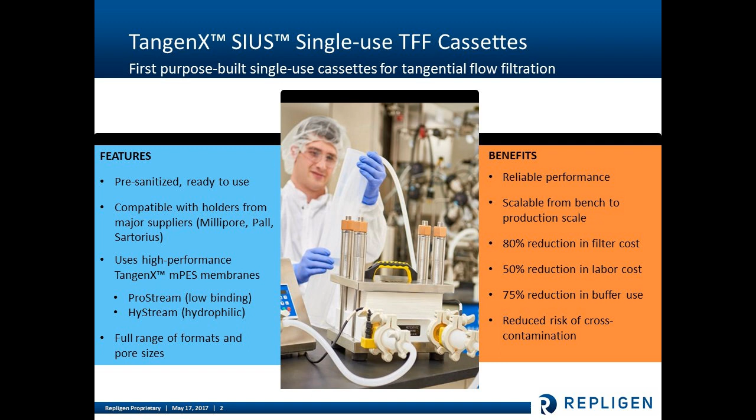Our discussion today will also describe how the SIUS single-use TFF cassettes will save time and money, reducing filter costs by 80%, reducing labor costs by 50%, and reducing buffer costs by 75%.

But first, I'd like to describe the two membrane chemistries we have available. Our TFF membranes are specifically formulated for narrow pore size distribution and efficient selectivity, providing reliable and repeatable membrane performance, as well as delivering fast permeate flux and high product recoveries. Both our membrane types are based on modified polyether sulfone.

Our ProStream membrane is available in a range of molecular cutoffs from 1 kilodalton to 300 kilodalton. It's a neutral charged, low protein binding PES and has similar characteristics typical to other PES membranes on the market today.

Our HyStream membrane is more unique in that it's more hydrophilic than other PES membranes. It's specifically been modified to be hydrophilic and appropriate for applications where cellulose membranes are typically used, particularly with applications for monoclonal antibodies. The HyStream membrane is available in ultrafiltration cutoffs from 5 kilodalton to 300 kilodalton, and in addition we have some microfiltration range from 0.1 micron to 0.65 micron.

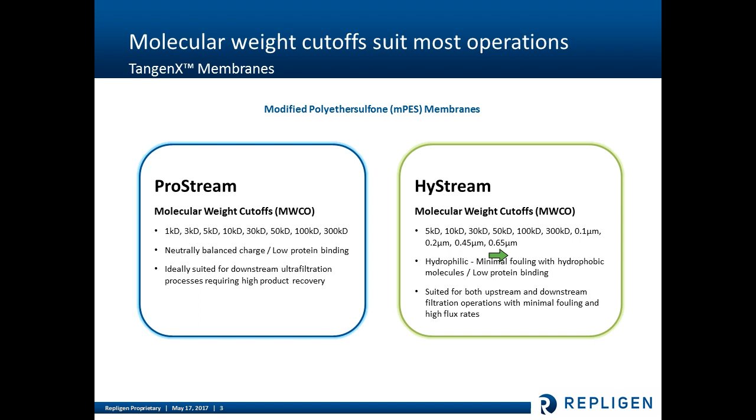Our SIUS and SIUS PD cassettes are available in a wide range of surface areas. The SIUS PD cassettes are available in 0.01 meters squared or 100 square centimeters, 0.02 meters squared or 200 square centimeters, or 0.1 meters squared. These PD cassettes are well suited for evaluation, screening, and process development, and are directly scalable to the larger surface area cassettes used for clinical manufacture, pilot plant, and even production scale.

The SIUS TFF cassettes are available in larger surface areas of 0.5 meters squared, 1.5 meters squared, and 2.5 meters squared. These cassettes can be stacked on top of each other to create larger surface areas, and they can be installed into traditional format TFF holders from all the major suppliers. Again, they can also be installed into the Repligen format, which has a fully disposable flow path.

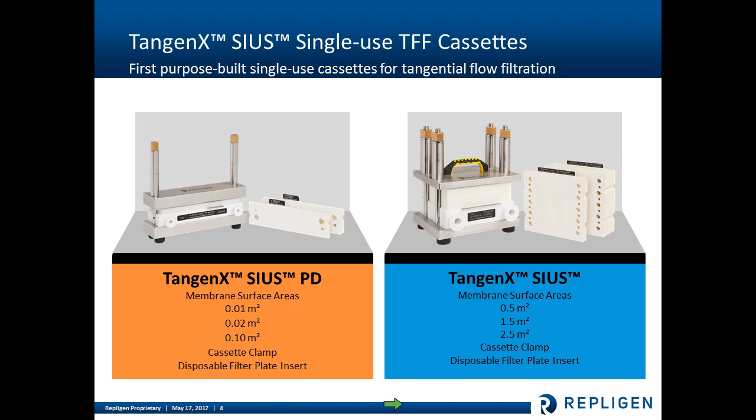So now we can take a closer look at the impact of single-use TFF format in downstream processing, and we can consider the cost of traditional reusable TFF cassettes compared to the SIUS single-use TFF cassettes. We did a survey of the major suppliers of reusable TFF cassettes in the market today.

Right now, the typical price for a reusable TFF cassette is about $5,000 per meter squared. Because of our unique manufacturing process, we're able to sell our SIUS single-use TFF cassettes at 1/5 the price, or 80% less than a reusable TFF cassette - just under $1,000 per meter squared.

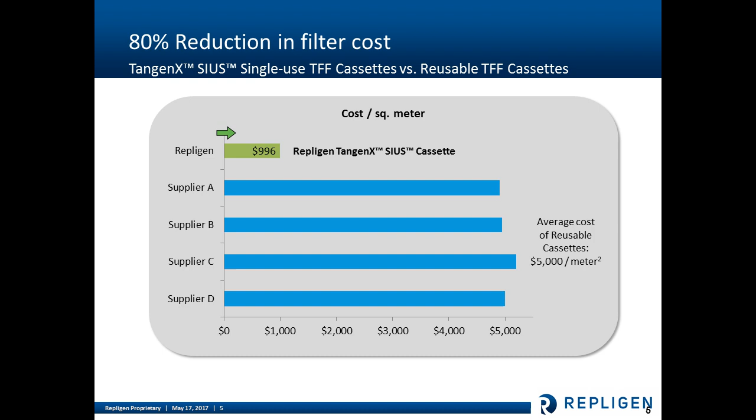Additional cost savings can be realized by reducing labor that's typically found in most reusable TFF processes. If we take a look at the graph here, at the bottom, we have a representation of a typical reusable process, and typical of most reusable processes for TFF is going to be 10 steps.

Typically, a reusable TFF cassette is going to contain some type of storage agent, glycerin or some type of bactericide, and that storage agent needs to be removed before use. So in the reusable process, we start with installation of the cassette, integrity test, and then we have to do a pre-use sanitization to remove the storage agent.

From there, we flush the cleaning solution out and have to perform a water permeability test. Typically, you want to do a pre-use water permeability test to establish a baseline of water flow rate in the new cassette, because if you're going to reuse the cassette, you need to measure the water flow rate before and after to make sure your cleaning efficiency is correct.

From there, we get to the equilibration step, and then finally to the actual UFDF process. In the reusable process, at the end of the UFDF process, we have to clean the membrane, sanitize with sodium hydroxide, flush that out, and then repeat the water permeability test to establish whether the cleaning efficiency was adequate. From there, we can go to storage of the system.

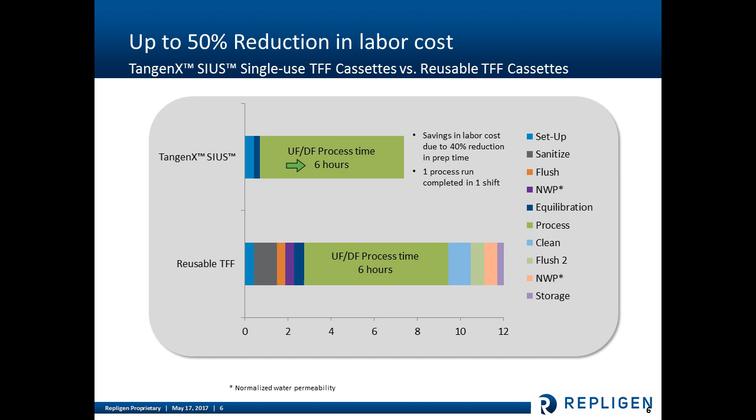Another area of savings is reduction in buffer usage. If we think of that previous slide where I showed the 10-step reusable process, we can assign a volume for each of those flushing and cleaning steps. If we were to totalize each of those volumes in terms of liters per meter squared membrane surface area installed, that would total up to about 230 liters per meter squared in the reusable process.

By eliminating the flushing and cleaning steps in the reusable process, we can reduce that volume to 60 liters per meter squared, or a 75% reduction in buffer usage. We can also consider the cost savings in regards to QC costs, transportation costs, and other costs for making and testing the buffers.

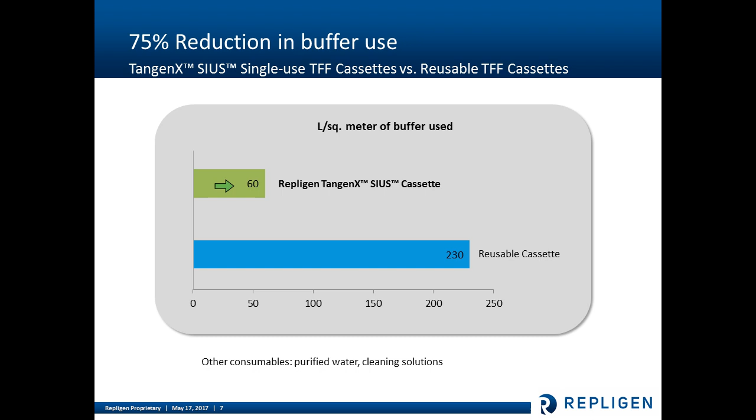Our SIUS TFF cassettes are fully scalable from process development through clinical manufacturing and into production scale, and they can be run at transmembrane pressure and cross-flow rates very typical of what you'd use in a reusable TFF process. They are linearly scalable from the 100 mL scale all the way to the 2,000 liter scale, and we have installations, end users with installations up to 30 meters squared and greater in our single-use format.

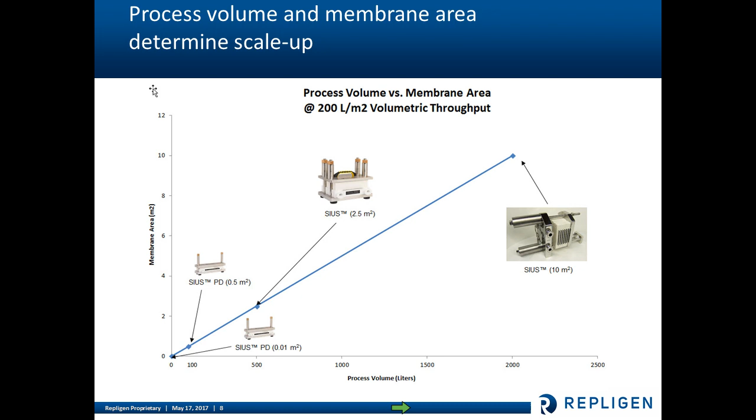We also offer our SIUS TFF holders with fully disposable flow paths. Here we're using a USP Class 6 polypropylene manifold to connect tubing and disposable pressure transducers and other single-use instrumentation, connecting directly to the tri-clamp connections on the manifold of feed, retentate, and permeate.

So in this case, there's no fluid contact to the stainless steel end plates, and we completely eliminate the need for cleaning of the TFF holder. This holder format is available in benchtop scale all the way up to production scale.

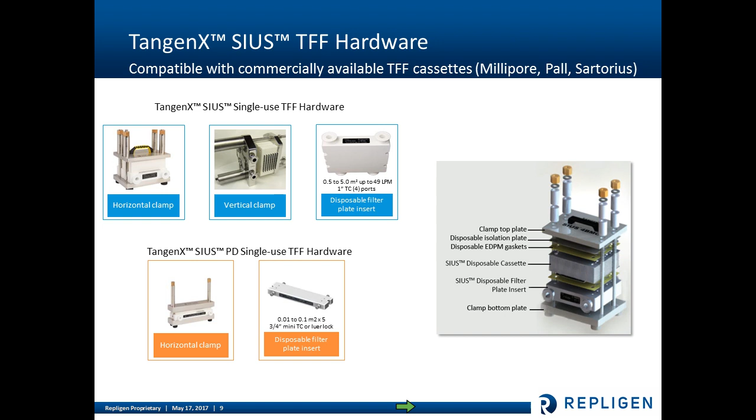Repligen also offers a urethane encapsulated reusable format with our Pro Series TFF cassettes. These are more traditionally built cassettes, well suited for repeated CIP and reuse cycles. They're also available in the same surface areas as our SIUS single-use cassettes, for low process development scale and process scale.

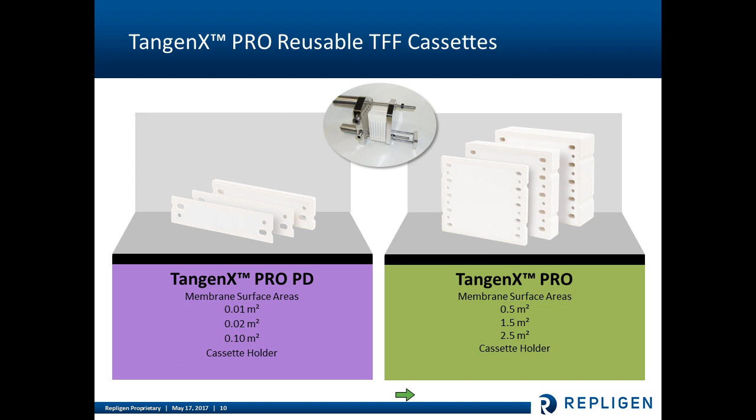An important point is that as membrane area increases with late phase clinical or even commercial scale, the process scale economics for TFF can swing back in favor of reusable format. Our Pro Series reusable cassettes are directly scalable from the SIUS single-use TFF cassettes. In fact, the exact same membranes are available for both formats. So if you begin using our 30K HyStream membrane in single-use format at clinical manufacturing scale, you can get that same exact membrane in our reusable format if your process economics favor reusable at larger scales.

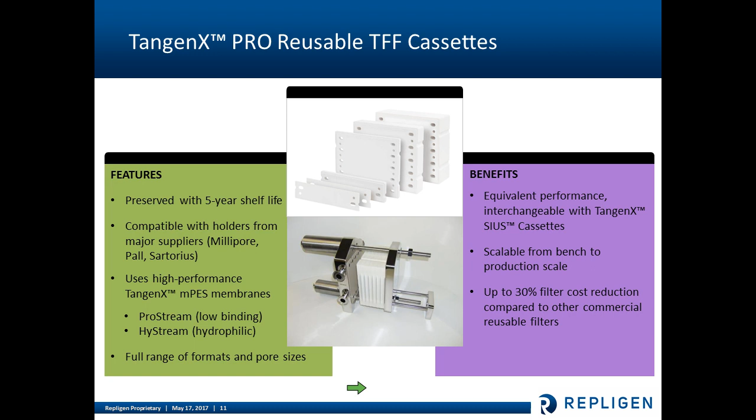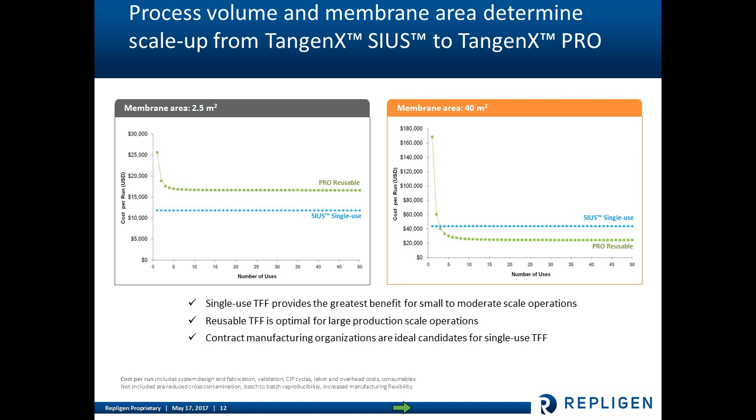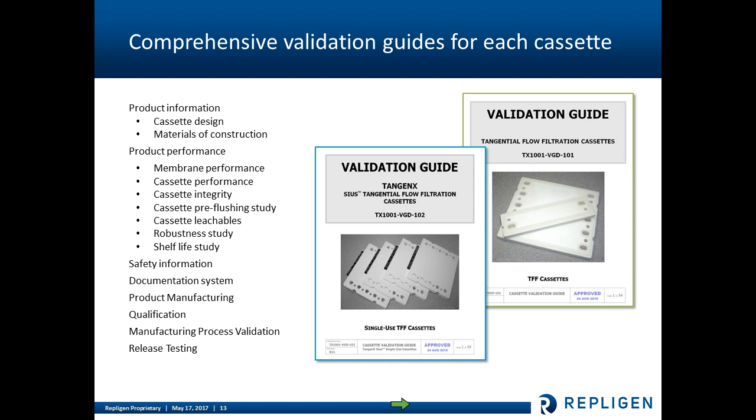Our single-use and reusable TFF cassettes are fully supported with our validation guide, which includes information on leachables, extractables, and other product safety information such as USP Class 6. Each of our TFF cassettes is individually integrity tested and provided with a Certificate of Analysis that indicates compliance with our quality release testing.

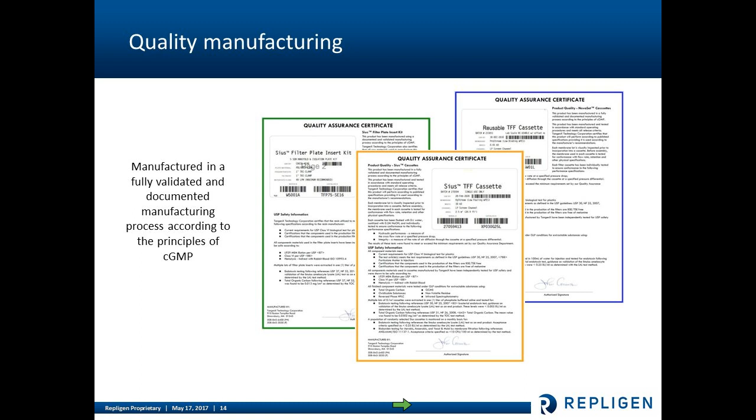In summary, our Repligen SIUS single-use TFF cassettes have a highly positive impact on cost savings and increased productivity in downstream processing steps of concentration, diafiltration, and buffer exchange. Filter costs are reduced by 80%, labor savings by 50%, and buffer usage reduced by 75%. Hopefully Repligen can bring that same increase in productivity to your UFDF processes. Thank you for your time, and we're available for questions.

Okay, thank you, Michael. So we do have some questions. Do you have a similar technology for spiral wound crossflow system?

The TangenX format is only available in flat sheet cassette format. We are compatible with cassette holders from all the major suppliers of TFF cassette holders, but it's only available in flat sheet format.

Okay, so the next question is: for reusable cassettes, why would you need to run a pre and post normalized water permeability test? For reusable?

Well, yes, you need to do a pre-use water flux test to establish the baseline. Typically that's run when the cassette is new, on first use, to establish a baseline clean water flux on that particular cassette. Suppliers can give you some water flux information, but you really need to test the actual filter installation. You only need to do that pre-test the first time, and then when reusing a cassette and cleaning it, you need to do the post-use water flux to compare the recovered water flux to that original value, and calculate a ratio. Typically the guideline is to have at least 80% recovery of your water flux to establish that the membrane cleaning has been efficient.